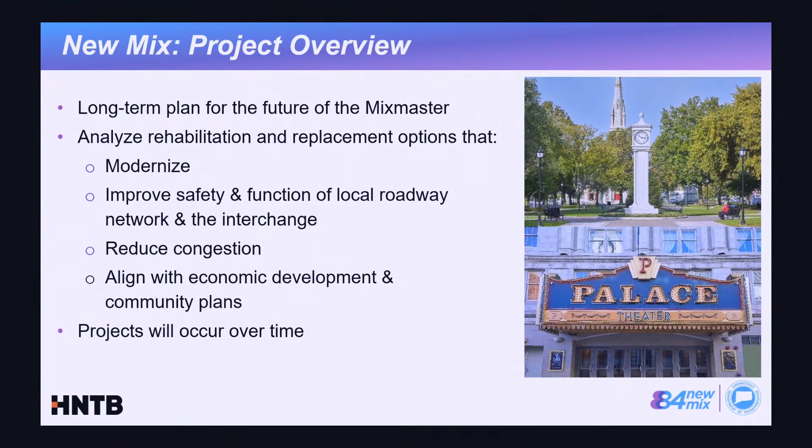Now, as I said, this is a master plan, and we'll have projects that occur over time. We have three types of these projects. We have the early action projects, which are standalone improvements to the highway or the local roadway network, and one of those is what we're going to talk about tonight.

Then later on we'll also have near-term projects, which are more improvements to the highway up on the legs away from the core of the interchange. And then we have the long-term project, which is right at the core of the interchange.

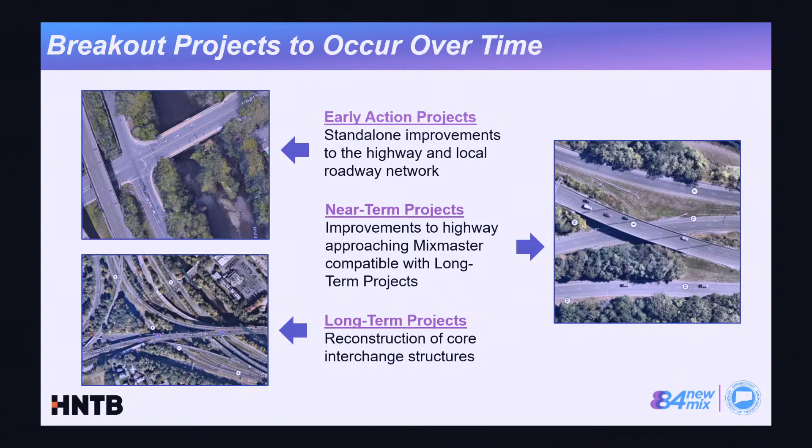So with these early action projects, as I stated, they're smaller, standalone improvements to the highway or the local roadway network. They're intended to improve safety and traffic operations. They've been coordinated with the City of Waterbury, and we have a review process that's separate from how the New Mix is looked at.

So with that, I'll introduce Rudy Francimori, who's going to talk you through the project we're here to discuss tonight. Thank you, David.

The project location that we're talking about tonight, the extents of the project start at Aurora Street, where you have the exit 35 on-ramp, and the southernmost limit of the project is West Main Street. The westernmost limit of the project is just shy of Grandview Avenue, and on the east, the project limit is just past or just shy of the Naugatuck River.

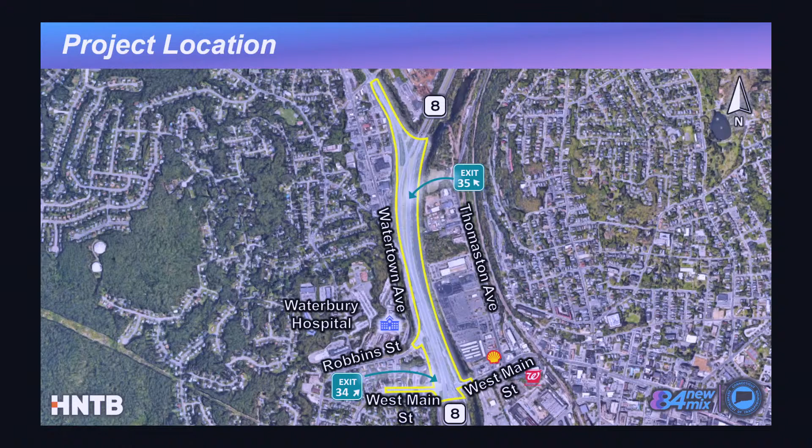The project need, the reason why this came up, was that West Main Street was identified in a needs and deficiency study report that was conducted, as an area that has high congestion and high crash locations.

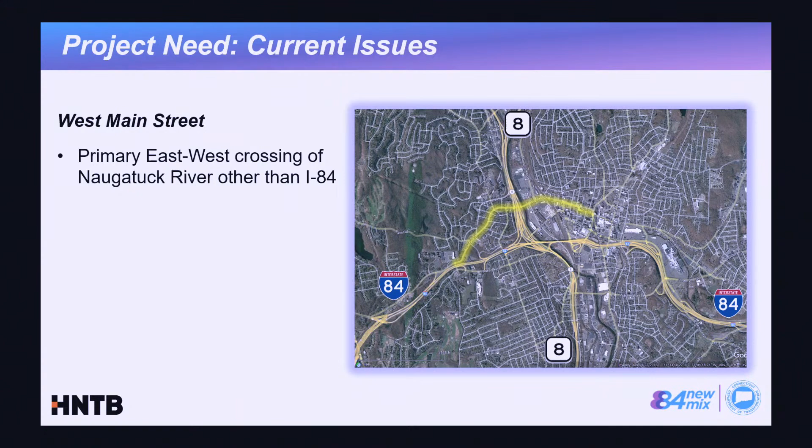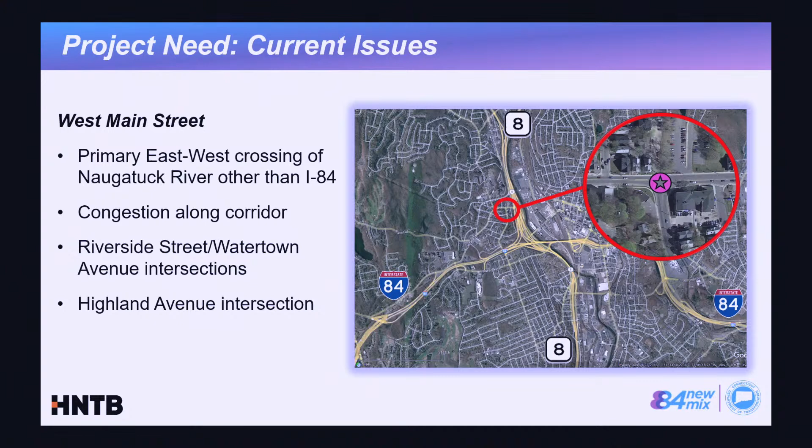West Main Street is the primary east-west crossing of the Naugatuck River, other than 84. It starts at the ridgeline of Waterbury on the west, and continues through Waterbury into the downtown area. We have severe congestion at certain times of the day along this corridor, and we've identified 3 intersections along West Main Street that are high crash locations: Riverside Street at West Main Street and Watertown Ave at West Main Street. And then just to the west of those 2 intersections is Highland Avenue, the Highland Avenue intersection.

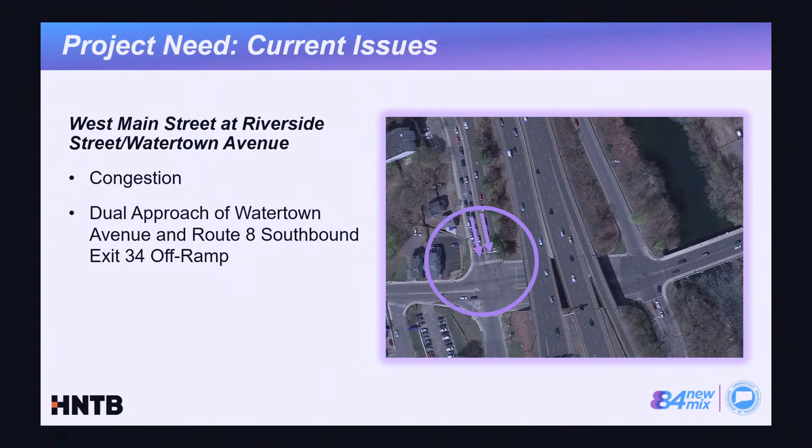Let's take a look at West Main Street at Riverside and Watertown Ave — again, a high congestion area. We have the dual approach of exit 34 from Route 8 southbound combining with Watertown Ave southbound, creating a dual approach at West Main Street and a very inefficient traffic signal that contributes to the congestion. There are also very poor eastbound-westbound alignments, which doesn't enhance driver anticipation, creating additional congestion. It's also a high crash location, which I'll get into in a future slide.

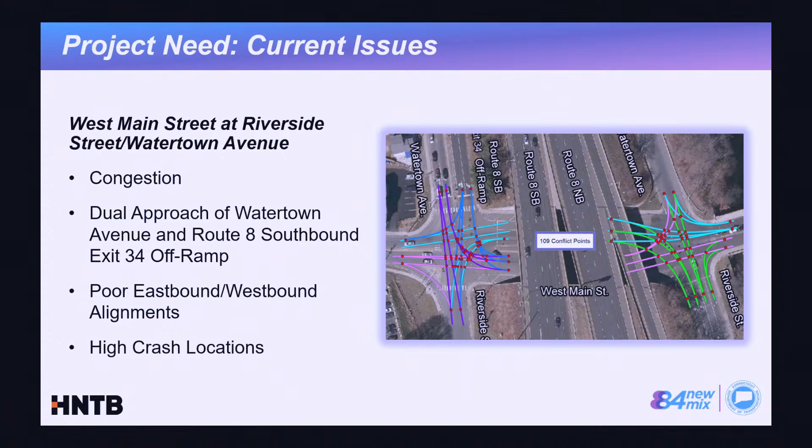West Main Street at Highland — this is the intersection about 350 feet just west of Watertown Avenue southbound. Currently it's a stop-controlled intersection, and again, it's a high crash location.

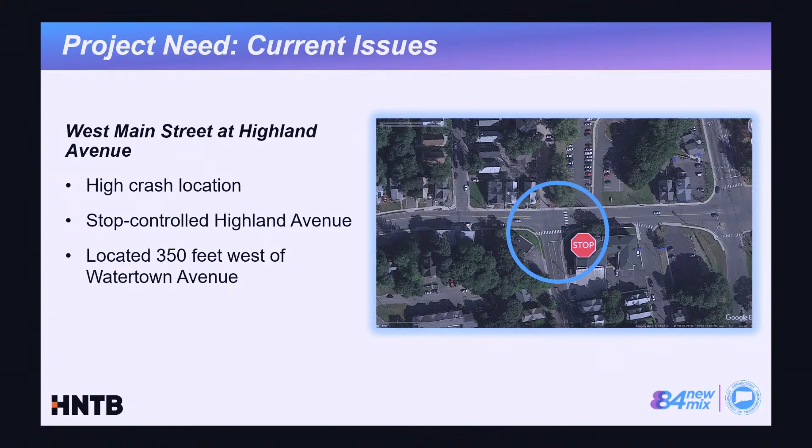The project goals are to improve safety on West Main Street between Highland Ave and Riverside Street, improve traffic operations along that stretch of West Main Street, and improve air quality through the reduction of idling cars.

Now I'm going to get into the proposed concept. These next few slides will be divided — first I'll talk about the local road improvements, and then I'll talk about the improvements we're looking at for Route 8 southbound.

The project limits — the main part of this project is the relocation of exit 34 from its current location at Watertown Avenue to just opposite of Robbins Street. In doing that, we would remove the old ramp, creating a two-way, bidirectional Watertown Avenue, and removing the northbound connector of Watertown Avenue. We're also proposing four new traffic signals: at Robbins Street, a new one at Highland Ave, and two on West Main Street.

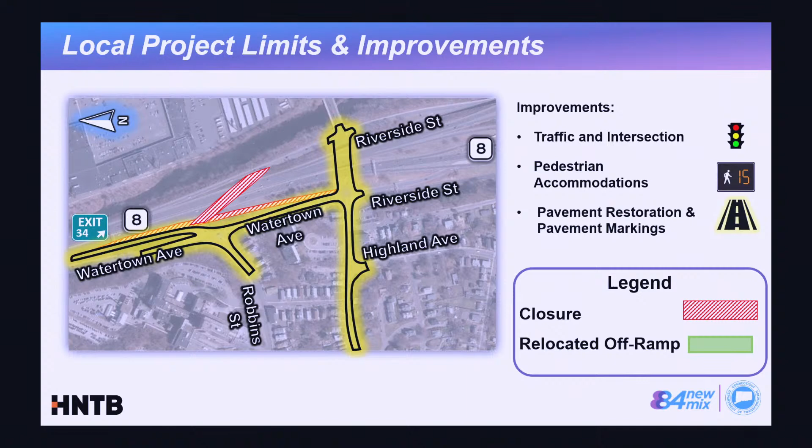We're also going to be providing pedestrian accommodations, as well as pavement restoration and new pavement markings throughout the project limits. We can leave this slide up later if you want to look.

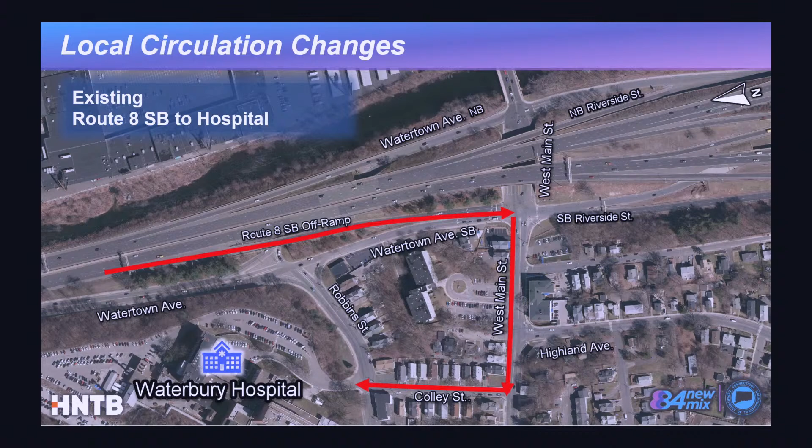Under the proposed condition — so the question is, if you're coming down West Main Street heading toward the hospital right now, you'd take a right turn, go up this southbound leg of Watertown, come under the highway, and there's just a stop-controlled intersection here, and you'd go across onto Robbins Street. In the future, you would have to go through this intersection here instead — Watertown Avenue is going to be entirely on the west side, so you'd have to come up here to another traffic signal to get onto Robbins Street.

The question is whether we've looked at drainage yet. At this point we haven't really put pen to paper, but as part of the design we would certainly be looking at drainage.

Yeah, that's great, that's great info to have. Thank you. Sure, go ahead.

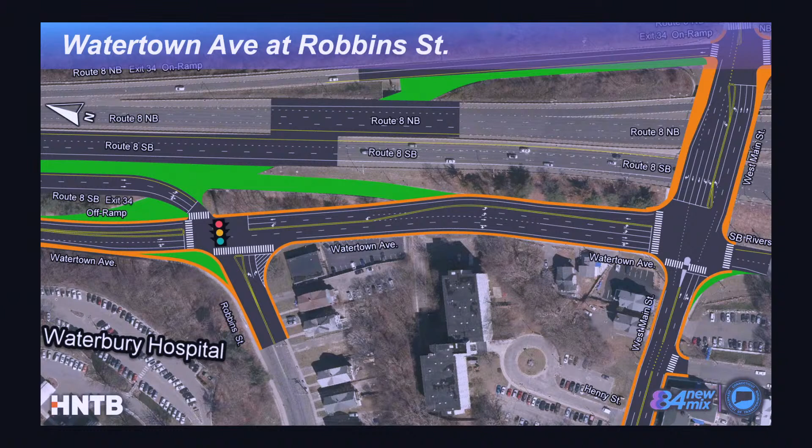The alignment still has some challenges here when you're heading under the bridge. You're talking about crossing the river up here? Yeah. We are using the appropriate angles coming through here for the design speed, but everything does neatly line up.

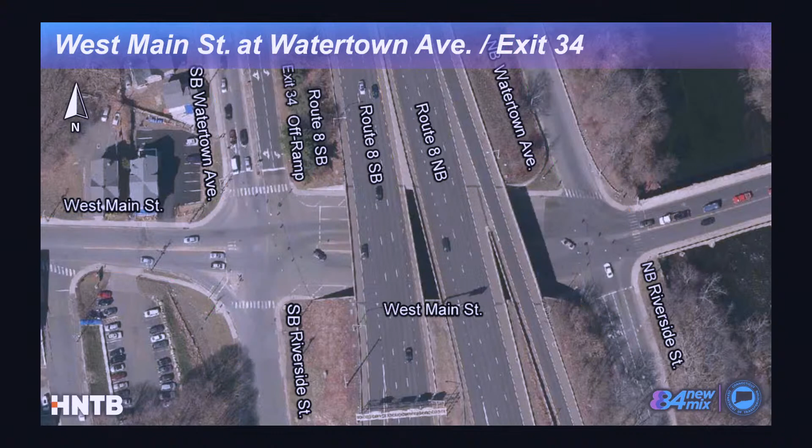This would be — no, unfortunately — this would be proposed to be a raised island.

Yeah, this is definitely an improvement from the way it is, because we are forcing people further to the right with this raised island — that was the point of the raised island, to force them over to the right. Then we're channelizing them with just a painted island to get further over to the left for the left turn, and the two throughs will line up much better.

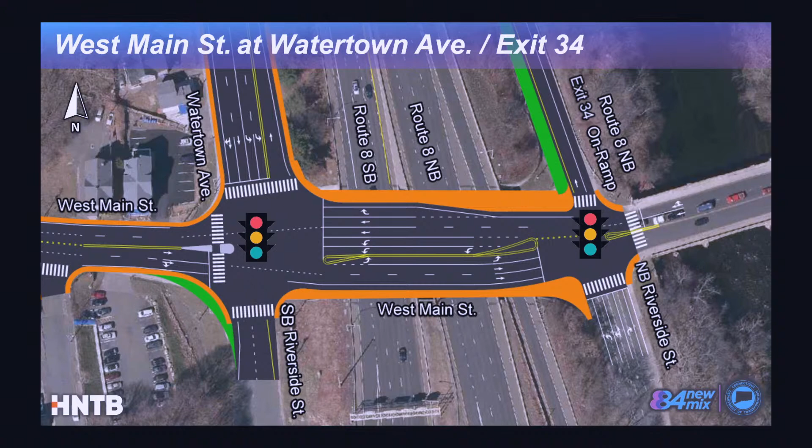At this point, because it's still concept, we haven't gotten to that part yet. One of the ideas is to remove those bridges entirely, though that does pose a bit of a traffic challenge. There are methods of filling under the bridge, but then you still have the bridge structures themselves. So we're looking at all the best alternatives for that. It'll be a rotary on Route 8 southbound — I'm kidding. But that topic of what happens to the void underneath the bridge is a huge concern, and it will not go unaddressed.

Any other questions?